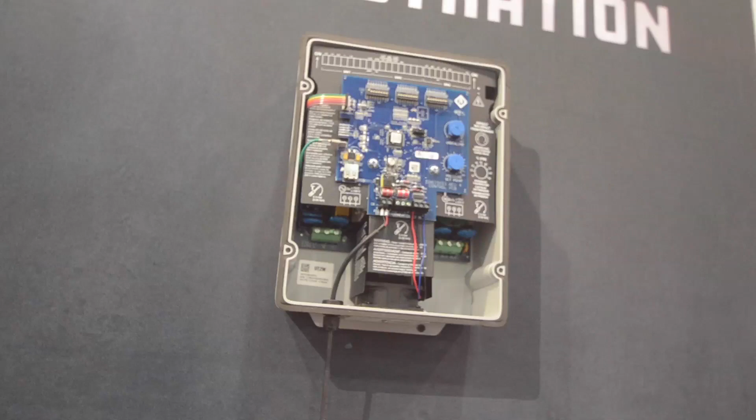This is a constant pressure drive that's used for contractors who are doing two-wire installations. And this is what we like to call a pump contractor's multi-tool. The reason why that is true is because with one product, you can go from 1/3 all the way up to 2 horsepower, 13.1 amps. It can be used on surface or submersible motors. It can be used on biax start or PSC start motors. Additionally, it can be used on 115 or 230 volt, all in one drive.

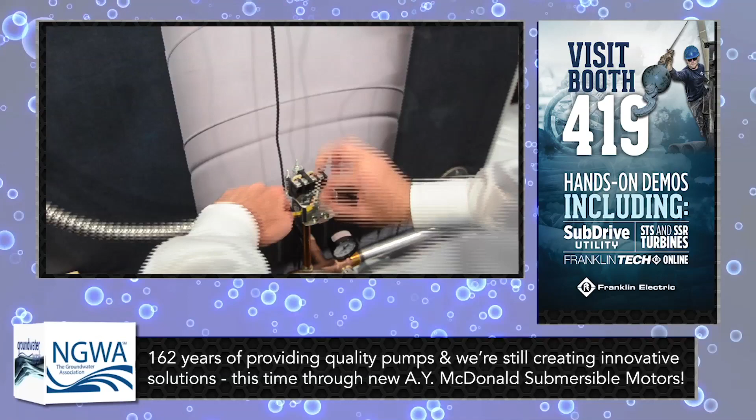So what we're really trying to highlight here is that this product is simple and easy to install and should be on every pump contractor's truck because it can be used at every installation that's a two-wire installation. You can use it to very quickly convert a conventional system into a constant pressure system, adding protection and performance to that system when you install this drive.

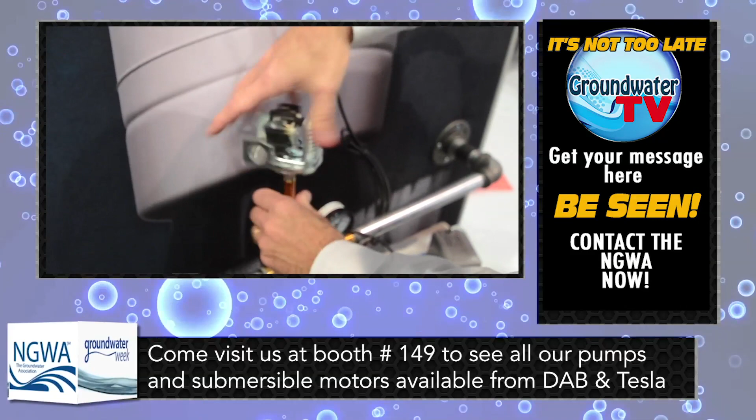So what we're really showing here is you don't need new cabling. You can stick with the 2 wires that you have installed in the ground and to the pump. And additionally, you can even stick with the large tank that's in the system now. It's very easy to set up, and you can remove the pressure switch in the system and install the drive instead and quickly convert it over to a constant pressure system.

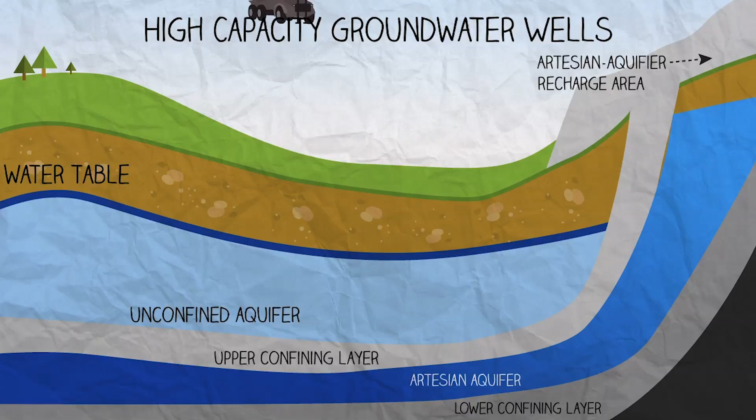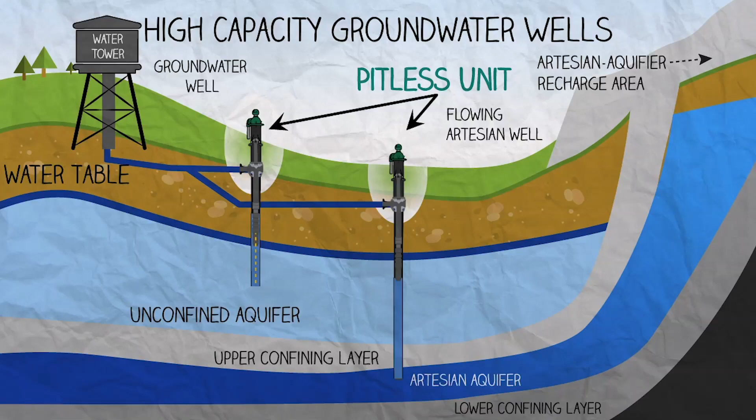Pitless units are ideal for high-capacity groundwater wells that can withdraw more than 3,500 GPM or 5 million gallons per day. A pitless unit is a watertight extension of a well casing that allows the spool and submersible pump and motor assembly to be removed without disturbing the discharge piping.

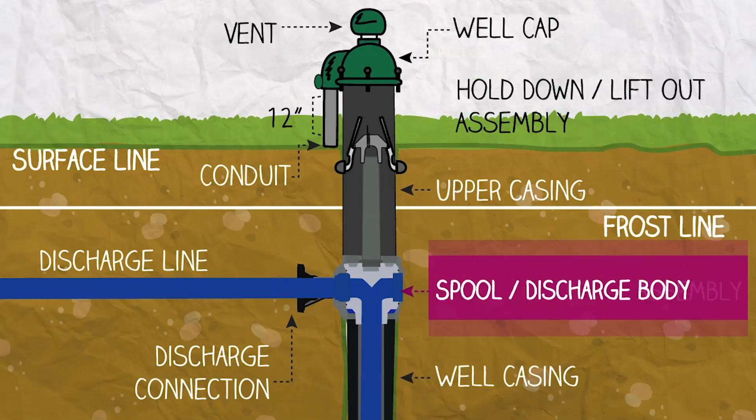The unit consists of a well cap, upper casing with hold-down assembly, spool, and discharge body. A pitless unit does not need a well house or well pit. This saves time and money on land allocation, project materials, excavation, and HVAC for the structure. The design also prevents surface contamination of the well and aquifer that can occur with pump houses and well pits.

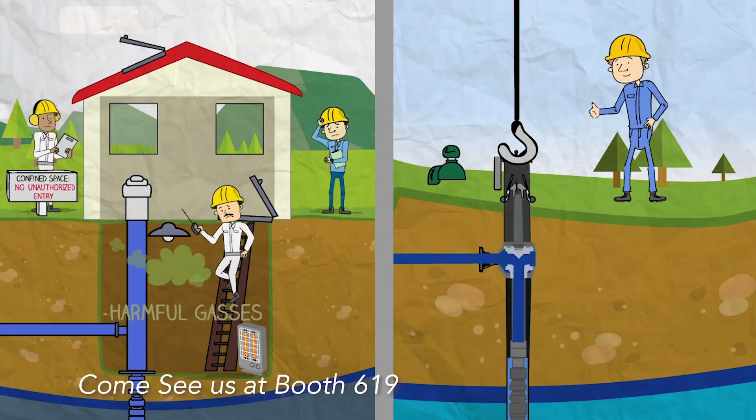Easy to install and set up, a pitless unit makes contractors' jobs easier too, as they no longer have to deal with confined space access permits when servicing the unit. The pitless unit also eliminates the loud noises associated with line shaft turbine pumps.

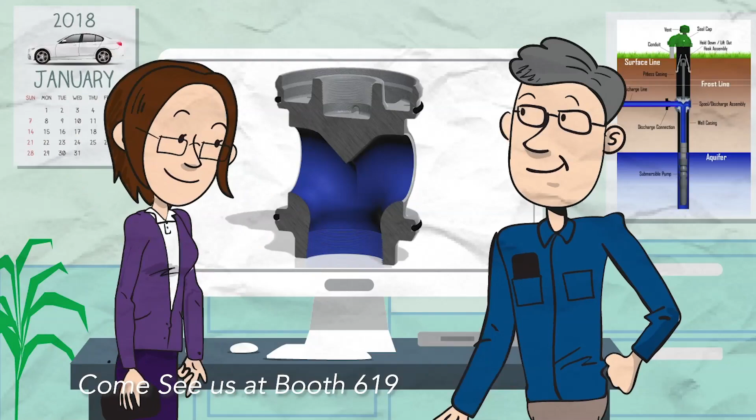The pitless unit was invented by Baker Manufacturing in the late 1940s. As pioneers of the pitless unit design and holders of the original patent, Baker continues to be an industry leader in pitless unit products. Today, Baker Monitor brings the same superior quality, customer satisfaction, and continuous improvement that customers have come to expect.

Through extensive third-party testing, Baker's Monitor pitless unit is the only NSF 61 and 372 certified product on the market. This certification ensures safe, potable water for end users and is a requirement for most public water distribution systems.

Monitor pitless units are made in the USA and manufactured at Baker's Evansville, Wisconsin facility. This allows the units to be designated American Iron and Steel compliant when requested.

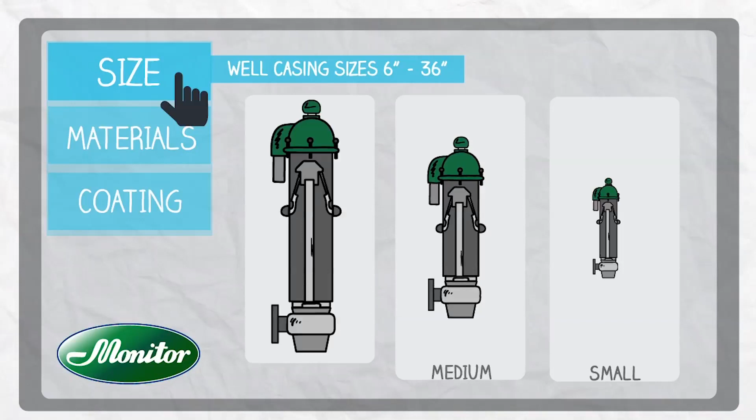Monitor also offers the widest range of pitless unit sizes, coatings, and materials on the market. Our pitless units are suitable for well casing sizes ranging from 6 to 36 inches. They are available in standard cast iron, custom fabricated steel, and premium stainless steel materials, and can be lead-free, galvanized, or fusion-bonded epoxy powder coated.

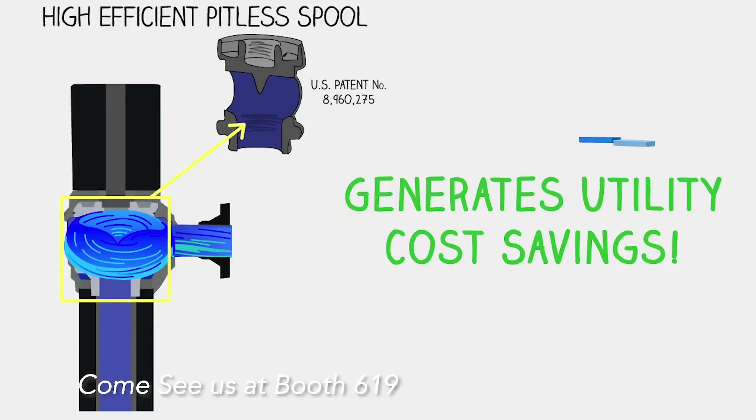Additionally, Baker recently introduced a patented spool that significantly reduces pressure loss through the unit, which lowers electrical costs for end users. The new spool design also boasts increased cable passages to allow for larger cables and probes.

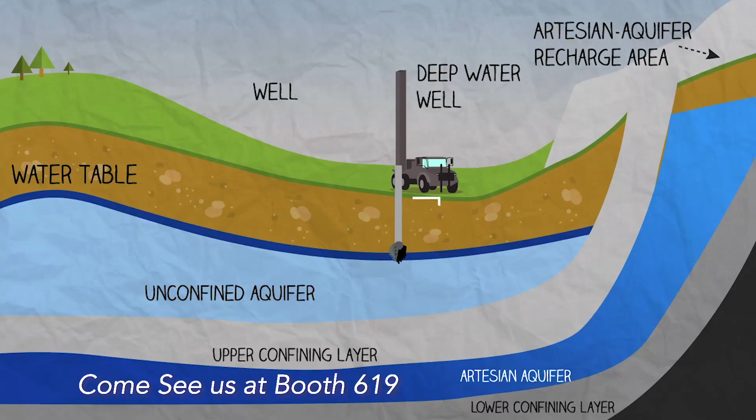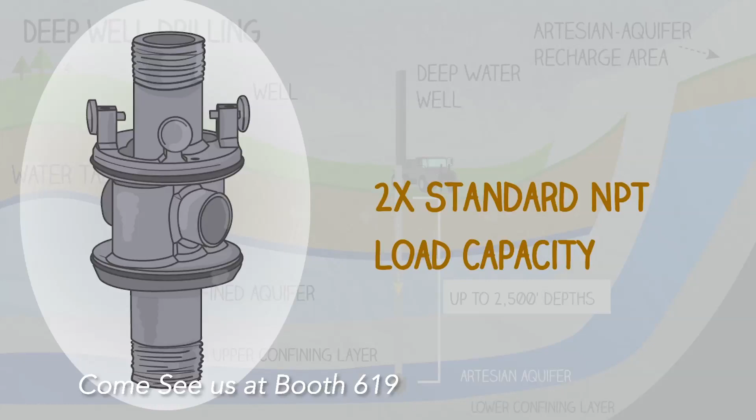Need to drill deep? Monitor's new deep well pitless spool can handle over twice the load capacity of a standard spool, allowing for much deeper well depths. The DW spool design incorporates API 8 round threads on its lift-out and drop connections.

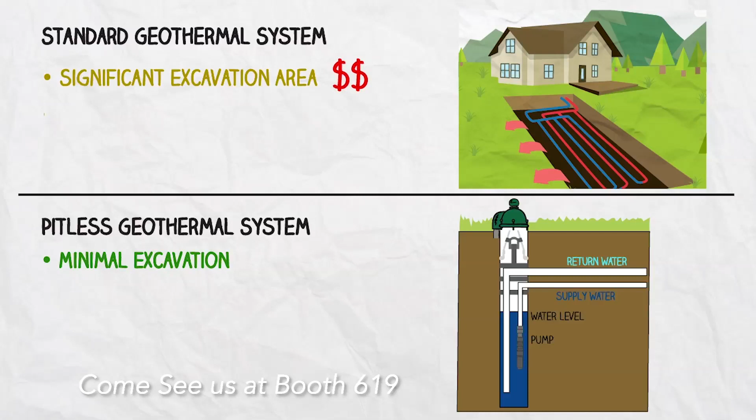Pitless units can also be used for unique applications. Geothermal pitless units reduce excavation area and eliminate extensive pipe networks. A single well provides both the geothermal source and injection line. Triple seal pitless units allow for 2 separate pressure zones with independent drop and discharge connections.

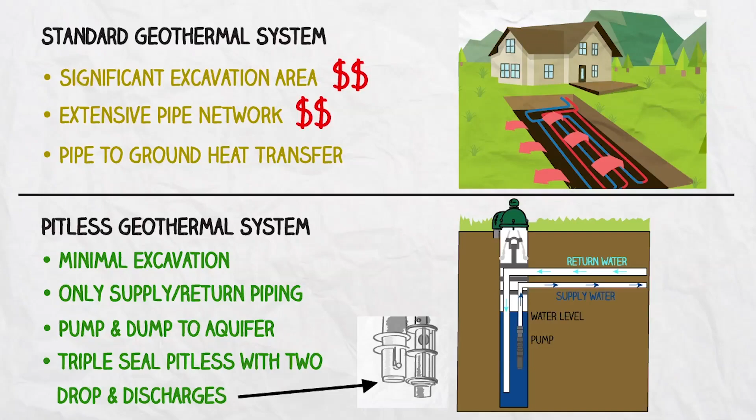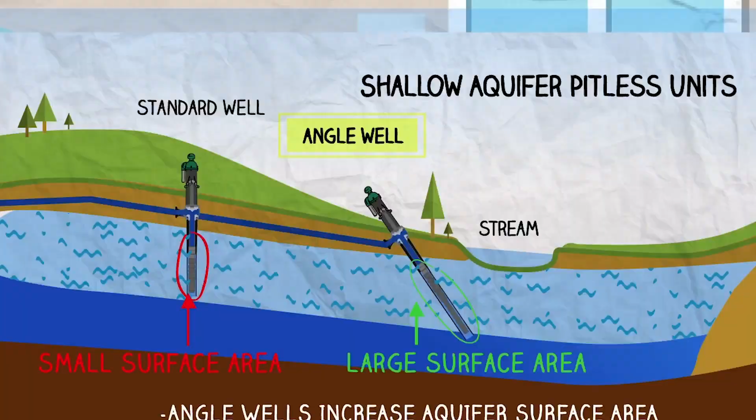Here in booth 419, the Franklin Electric booth at Groundwater Week 2018, with Jeff Frank. Jeff, tell us what we've got right here.

What we've got here is Franklin's solar-powered pump product line. The product line has been out for almost 10 years, and this year we've got 3 new additions to the family. We've added one drive that covers 5 to 10 horsepower, with DC power input. That means we can go up to 375 gallons per minute, and we're doing both 6-inch motors and surface motors with this system.

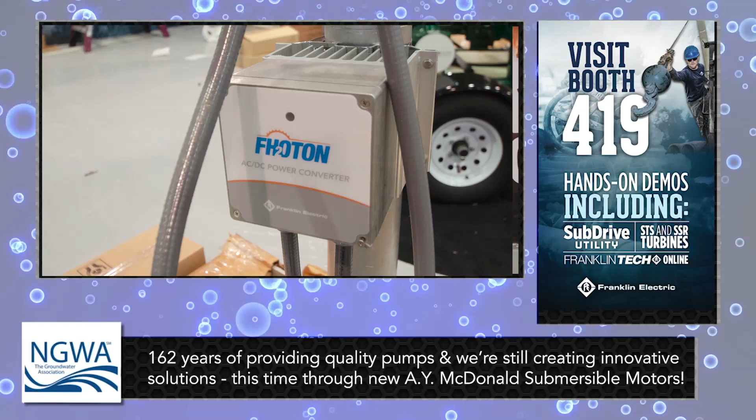So that's DC power for both remote locations or places just looking to conserve energy. Additionally this year, we've added 2 other products to the line. We've gone on to the other side of the product line where we've gone smaller, so now we have a 1/2 horsepower system. That means the systems will operate all the way down to 2 solar panels in many cases. We've also expanded to offer surface pumps, so that means we can run booster pumps, jet pumps, sprinkler pumps, all those standard residential surface pumps can now be DC power input running on solar energy.

Here in the Franklin Electric booth, always a place you're going to want to stop by at Groundwater Week 2018.

Something new taking place this year at Groundwater Week is the Groundwater Career Professionals Panel. This is a neat opportunity. Established professionals from all ranks of the groundwater industry will share the twists and turns of their career journey. While designed primarily for those at the beginning of their career in the groundwater industry, this session is also designed for boomers and just-past-boomers handing the reins to the next generation.

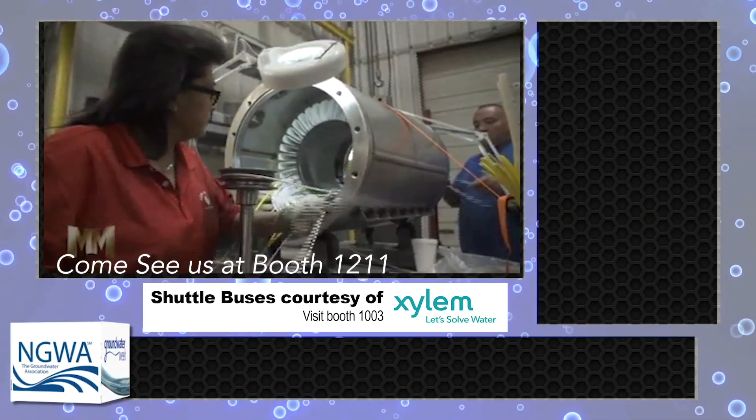Sunstar Electric Incorporated is a global leader in submersible electric motors that can take the plunge. Located in Lubbock, Texas, Sunstar operates a 75,000 square foot facility which is fully equipped to handle the unique challenges of electric motors which must operate underwater.

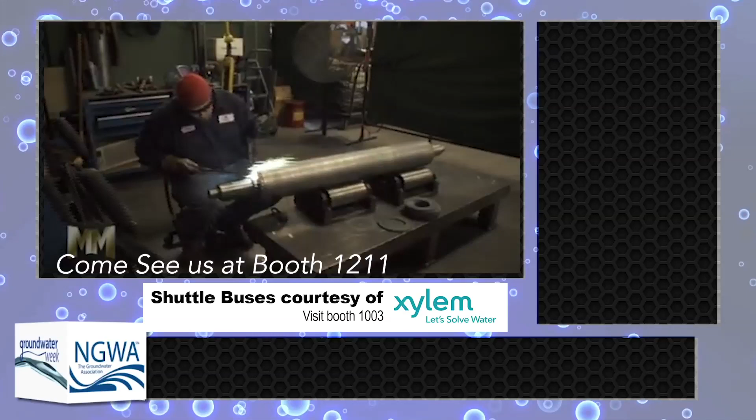Sunstar designs and manufactures water-filled and oil-filled submersible motors. It also produces and repairs deep ocean-capable Aquastar submersible motors for remotely operated vehicles known as ROVs. Sunstar is the world's largest distributor of Hitachi submersible motors. These are made for standard water wells and also high-temperature applications. Sunstar is the only authorized Hitachi submersible motor repair and manufacturing facility outside of Japan.

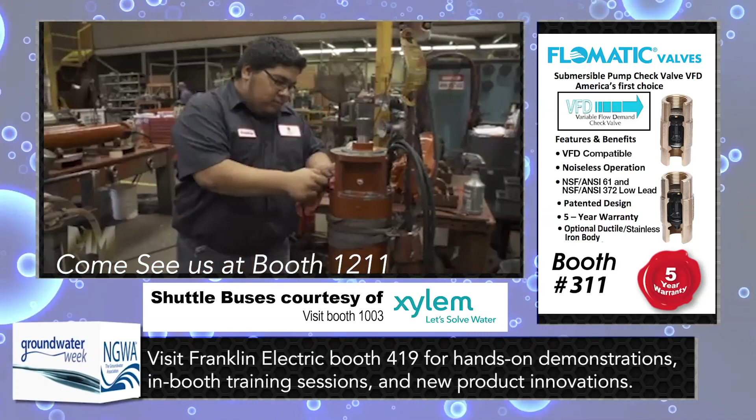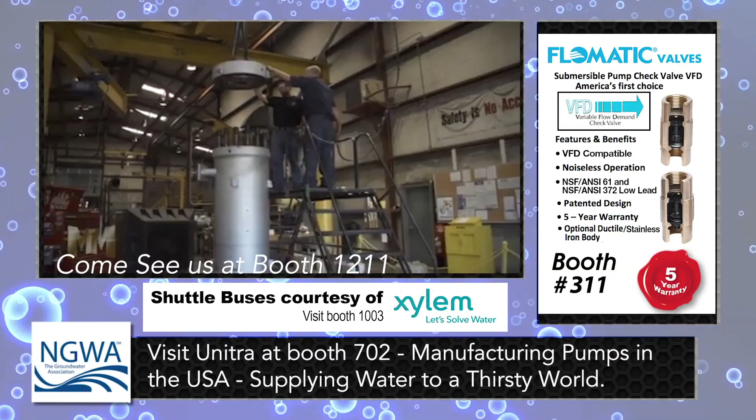The expertise of the company's engineers and highly trained workforce has led to the ability to supply both standard and custom submersible motors. Clients who require customized submersibles for special applications find what they need in Sunstar's extensive capabilities and knowledgeable talent base. In addition, Sunstar runs the entire gamut of service and repair, including upgrades and modifications, conversion, consulting, field service, and testing. Sunstar is the expert for rapid service and repair of the power generation industry's critical, high-pressure, water-filled boiler water circulating pump motors.

Since 1977, Sunstar has been exploring the depths of design, quality, service, and supply. The result is quality submersible electric motors which keep operating for years to come. Visit sunstarusa.com to learn more. This is John Criswell for Manufacturing Marvels.

A popular event each and every year at Groundwater Week is the Groundwater Foundation Silent Auction and Reception, taking place today from 4:45 to 6 p.m. in N109 through N114. This is a great way to mingle with your friends, network with colleagues, and place a bid on an item during the Groundwater Foundation Silent Auction. After the reception, stay for the NGWA Delegates meeting where a live auction will also be held. All proceeds from the auctions support the groundwater industry.